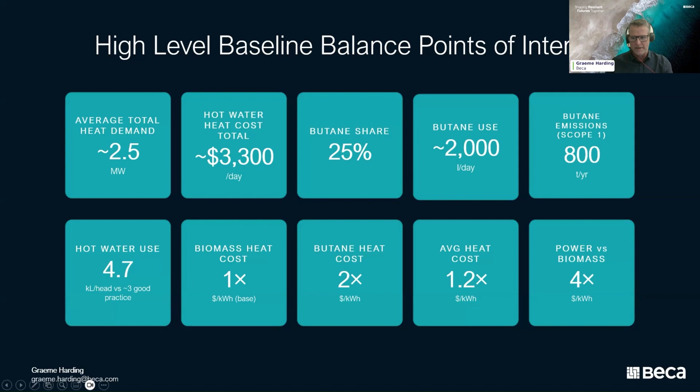So as Chris mentioned, we were looking at quite a lot of options at earlier stages. They were wondering about offsite rendering because there's site constraints, physical constraints as well. I wanted to look at MVR for high temperature rendering plants because, as any energy efficiency engineer looks at, when you've got a big refrigeration plant, the obvious thought is, can't we put a heat pump, can't we recover some heat there, produce our hot water there? But the classic situation with rendering plants is you get a lot of hot water from them.

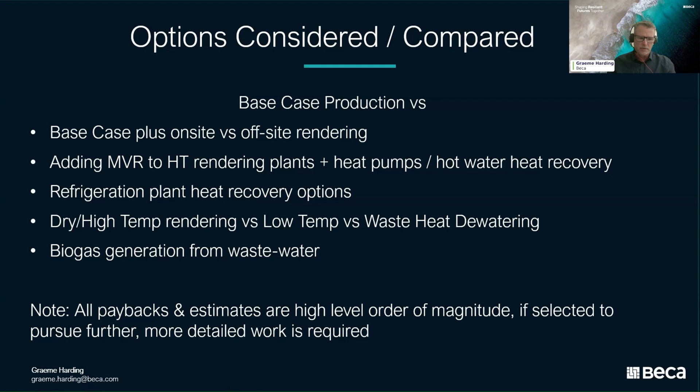So the idea would be to recycle heat within the rendering plant, and we wanted to look at how cost effective that would be. And then obviously also some refrigeration heat recovery options for them. We thought that there would be something in here that we could find some cost effective options for the site. And then we also looked at different rendering technologies because, when you're putting a new rendering plant in, what do you do? And to a lesser degree, we also looked at biogas, but I'm not really going to have time to go into that today. All paybacks that we're talking about here are high level, order of magnitude, and there would be some further work required if they are selected.

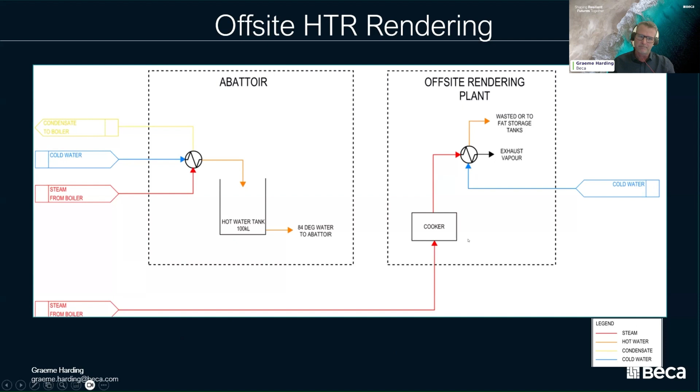At a very basic level, if you do offsite HTR rendering, what ends up happening is you waste some heat that goes to atmosphere, basically because you've got some exhaust vapors that you have to condense. You do typically, and we'll talk about it a little bit more later, use different technology if you go offsite because you don't want to waste so much heat. But this is just comparing high temperature offsite rendering versus on-site.

If you go on-site high temperature rendering, then you immediately can start recovering a lot of that exhaust vapor, and you can produce hot water, around 70 degrees, and you can recycle that hot water and pre-feed your hot water tank in principle. There are quite a lot of balance issues because your rendering plant typically doesn't run as long as your whole site, so you have to have a lot of storage, and sites do tend to waste quite a lot of that because the balance is a bit tricky.

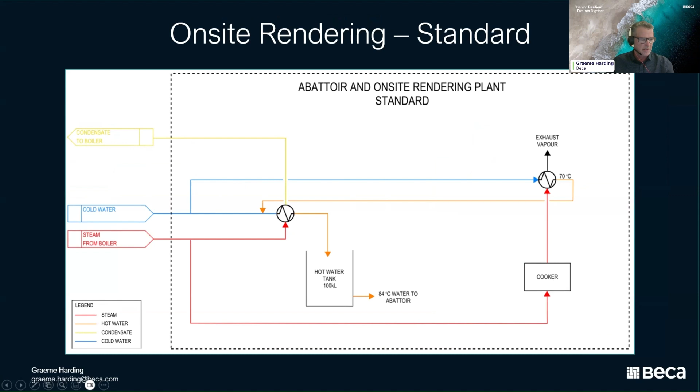But broadly, you recover a huge portion of the heat you put into the rendering plant. Around about 80% of the heat you put in, you get back as hot water, so that's a bit like cogen. Some good economies there. On this particular site, using a lot of water, it would be about 63% of the hot water demand they could produce. And the cost saving versus offsite is about $500,000 a year. So there's a significant benefit to going on-site versus offsite and squeezing it in somehow.

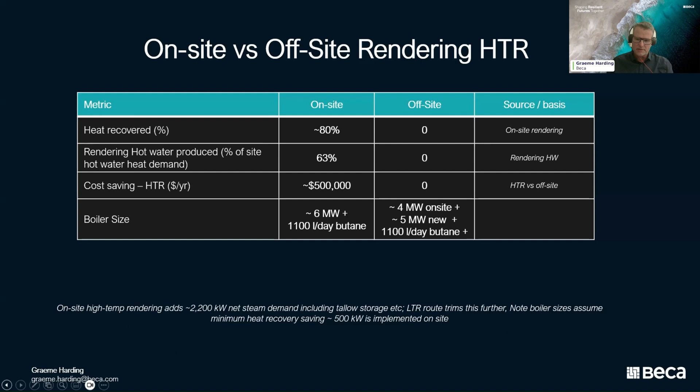You would need a new boiler, because you still need a bit of additional heat, even if you're recovering so much. From Chris's perspective, that's probably a good thing because he's a bit tired of his old boilers. But we couldn't really quite find the extra 2 megawatts to keep the existing boilers without significant investments.

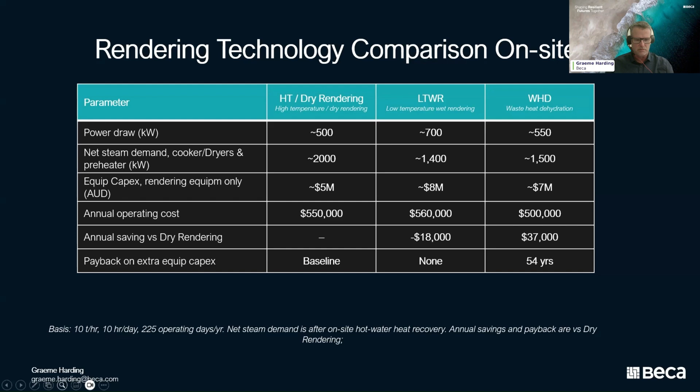And just looking at the equipment capexes, not even installed costs, the annual operating cost differences between the different technologies really are pretty minor, and there really isn't a payback to going for more efficient solutions. Particularly here where they've got biomass heat, which once you've installed a biomass boiler, as we found at Suntory, it's quite difficult to find paybacks with other energy efficiency solutions because the boiler is expensive, but then the biomass is relatively cheap compared to gas and power.

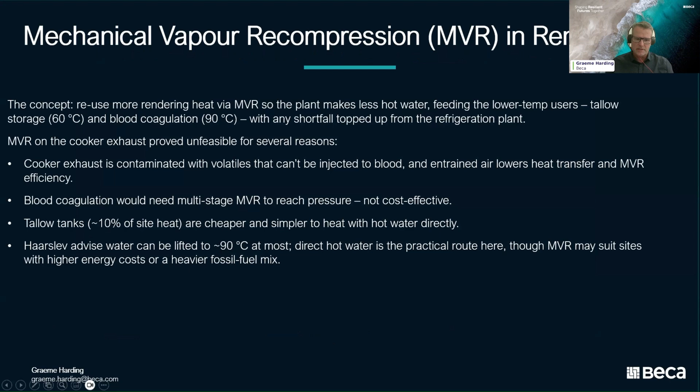Mechanical vapor recompression: we dealt quite a lot with Haarslev, who actually helped quite a lot. I need to thank them for their input and helping us with costs and things like that on the different technologies. Unfortunately, we quickly discovered that your cooker exhaust vapors contain air, which makes your MVR less efficient. There's also volatile compounds in there that you wouldn't really want to inject directly into your blood via blood coagulator.

There were really two places we were thinking about using MVR, which is on your tallow storage or your blood coagulator. And unfortunately, you can't directly take the vapor off and boost it up to the blood coagulator because A, there's contaminants, and B, the pressure you require is quite high. So you need multi-stage, which is not that cost effective. And as soon as you're going to take this heat to your tallow storage, you might as well actually just use the hot water directly because your tallow is kept at around about 60 degrees.

And if you have to have an intermediate flash tank, another heat exchanger, you flash, you lose some temperature, then you have to boost it up again. And by the time you've done all that, you might as well just use the hot water you produce directly on the tallow storage, because we think that the limiting heat transfer coefficient is actually on the tallow side, not on the hot side.

So we think that's actually a far more cost-effective route, and particularly on this site because they wouldn't have an excess of hot water, and so you're just robbing Peter to pay Paul really if you start trying to be more efficient in this part of the plant and elsewhere. If they can dramatically reduce their hot water storage or hot water consumption, then using some of this heat on the tallow storage becomes an option, but it would require a pretty dramatic change.

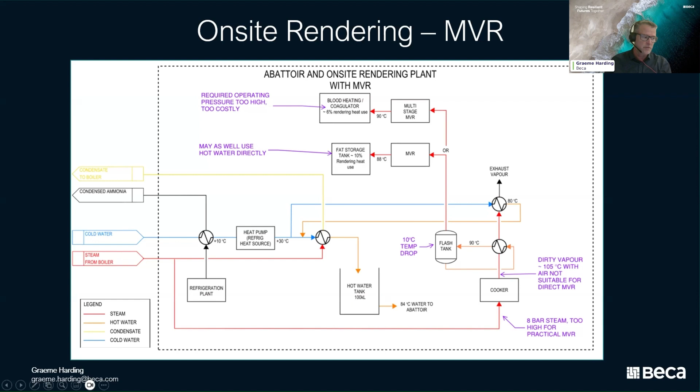There were still some heat recovery options. I mentioned earlier that butane is very expensive, and so you could put a condensing heat exchanger in on your ammonia plant and preheat some of your hot water supply to the site and to your boiler. And that's got a really attractive looking payback at this stage, and you would avoid a lot of your butane emissions. You could raise the discharge pressure on one of your smaller high-side compressors, or you could do oil heat recovery as well and pick up the heat recovery. That hasn't got quite as good a payback because you're starting to save biomass now and not just butane, but it does also increase your emission savings.

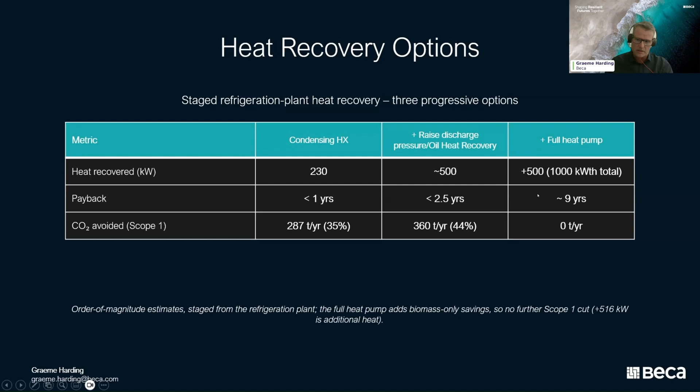And then a full heat pump, unfortunately, didn't really have a great payback because, as I said, by that point you're just saving biomass, which relative to their high power cost isn't that cost effective. On other sites in Victoria, I think it would be far more worthwhile looking at if you're competing with a cheaper power price and with natural gas.

So in summary, there are some cost-effective heat recovery options, particularly to get rid of butane, and part of the rendering plant solution should definitely be looking at that. They've got a blood ring dryer which uses butane at the moment, and you could potentially replace that as part of the new rendering technology that they install. So they could potentially get rid of all their butane usage on a daily basis anyway, maybe still have it as backup.

There are good opportunities to save water and heat compared to the good practice. MVR unfortunately wasn't viable, and we've looked at it on low temperature plants, and it also isn't that cost effective because of the pressures you need. On-site rendering delivers significant operating savings, and I think that's what they're going to be going for now.

And you probably need about a 6 megawatt boiler versus the current 4 megawatt boiler, although we'll do a deeper capex study still. And any new biomass boiler certainly should be ready for biogas, but their wastewater treatment plant is a bit of a way down the road, so there are some issues there as well. It's not just across the road, unfortunately.